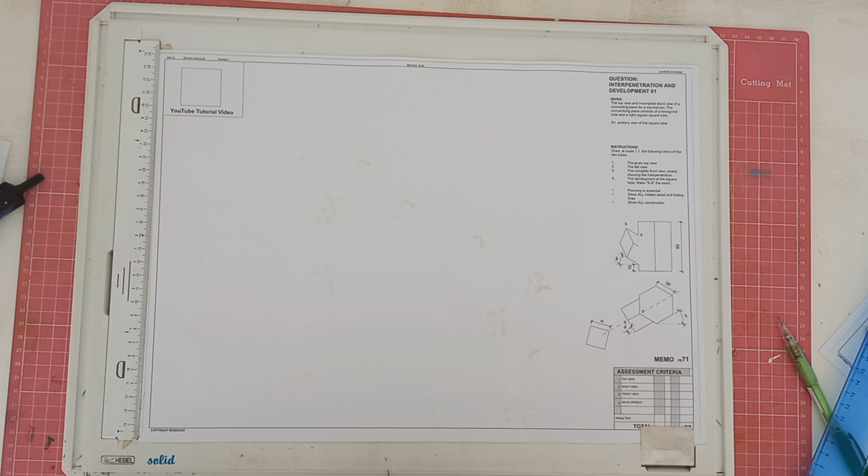Okay, so let's just get started. So we know that because we're drawing in first angle orthographic projection, interpenetration will be first angle orthographic projection, which means we will have the front view, the top view, the left view, and the right view. Okay, and 45 degrees, 45 degrees.

Now, because they're telling us they want the top view, complete front view, and the left view, we will know that this will be the top, this will be the front, and we'll obviously have to draw in the left view. So we're going to draw according to this orientation over here.

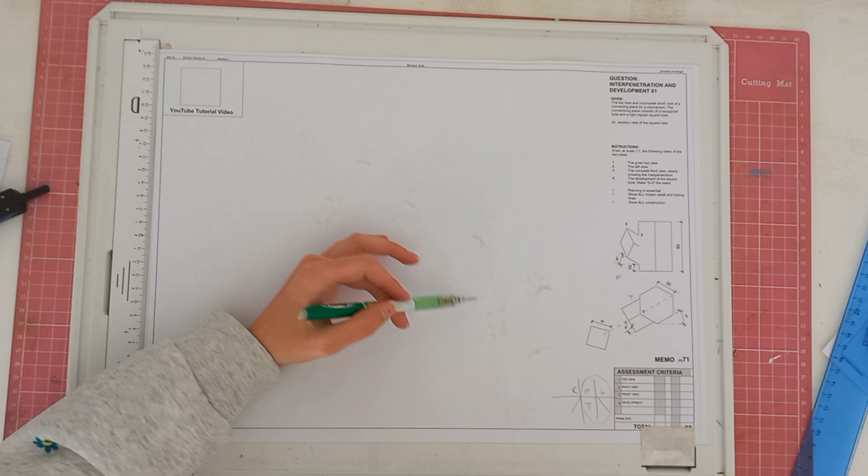Okay, and because of this, that means we should make it so that our page has our front and top view here and our left view here, and then we can do the development of the square here, or maybe at the top, depending on how the layout of our drawing works out.

Okay, so this is why they always say planning is essential, so that you don't start drawing and then realize, oops, you need to change something because now you've made a mistake. Okay, so we know top is going to be here at the bottom somewhere.

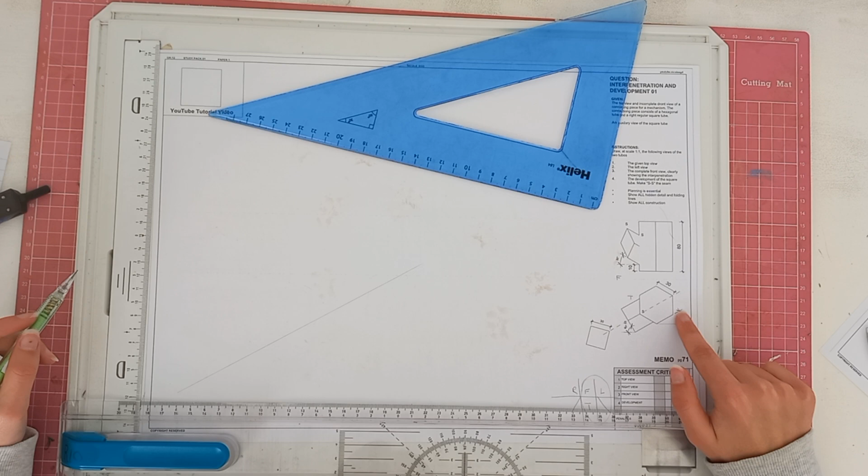So we're going to start off by drawing a 30-degree line going down like that. And the reason why we're doing 30 degrees is because you can see the angle given here to show that the hexagon is lying on a 30-degree tilt.

Okay, so now that we have got that, what we're going to do is we're going to take our compass with a measurement of 30. And so we're going to take the measurement of 30 on our compass, and we are going to draw a circle. So I don't want to waste too much space. I'm going to go here, so that it will leave enough space for the circle as well, maybe even just a little bit to the top.

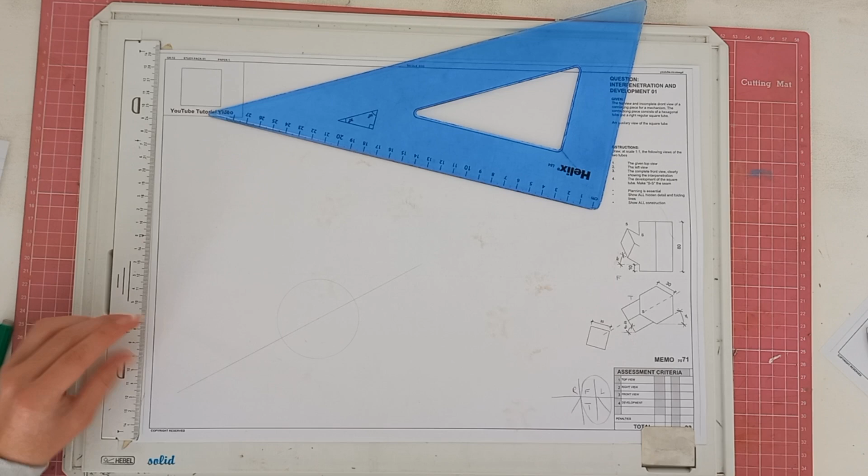Okay, and so we can start here. All right, once we have done that, we're going to section our hexagon so that we can obviously plan where everything will go. We're going to do that and that as well. Okay, and then we're going to lightly draw in the edges.

So everything we're doing now, we're doing in light construction lines, so that by the time we draw it in, we can draw it in solid and neatly without having to erase any lines that weren't supposed to be solid in the first place. Okay, and it's also good to start with construction because I know we're not really going

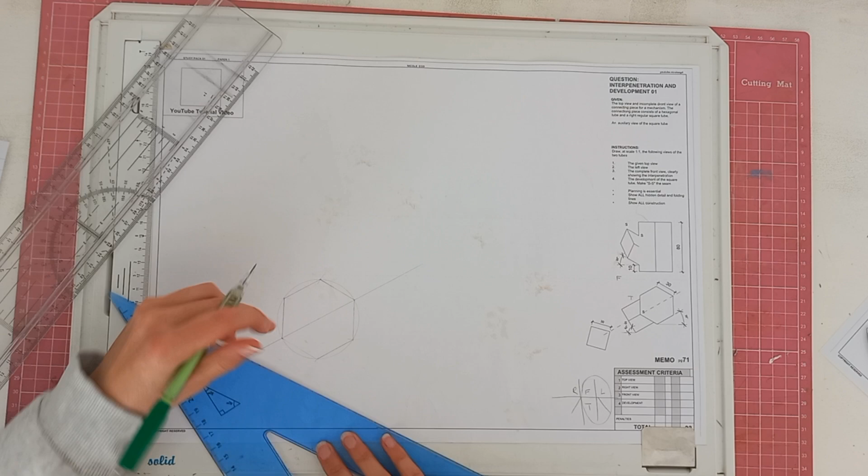to be doing anything to the top, but if you don't have enough space, you can then quickly erase it and start over again without ruining your page. Okay, all right, so there we've got our hexagon.

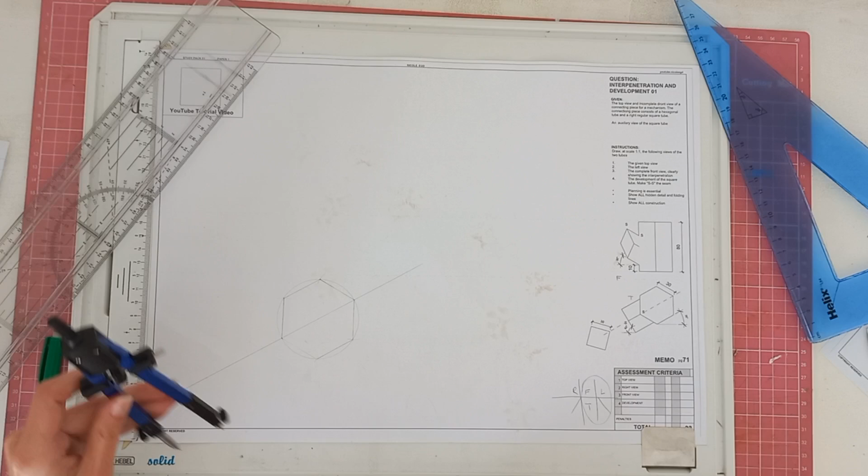Now we want to get this part of our curve in, but obviously it's going to be a little bit tricky because we've got a square here that's going to dictate where it lies on the curve. Okay, and so what we're going to do is we're going to take a measurement of 15 because that is half the length of the square side here, and we are going to draw a circle.

Okay, so it should look like this over here. All right, once we've got that circle, what we're going to do is get a square block around it.

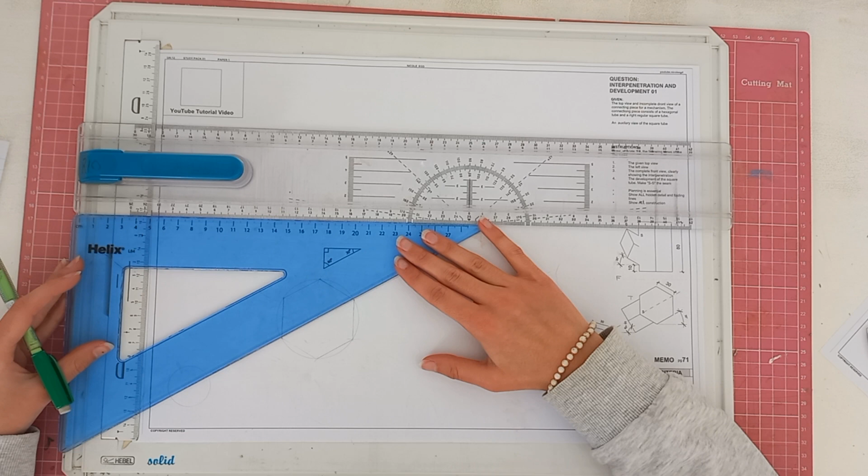So we're going to start off by taking our 30-degree set square, taking our ruler, and you see where we've got a 30-degree line. We're going to keep our ruler like that, and from that point we're going to draw in 45 degrees because obviously we know 45 degrees is this side of a square. Okay, so there we've got 45 degrees.

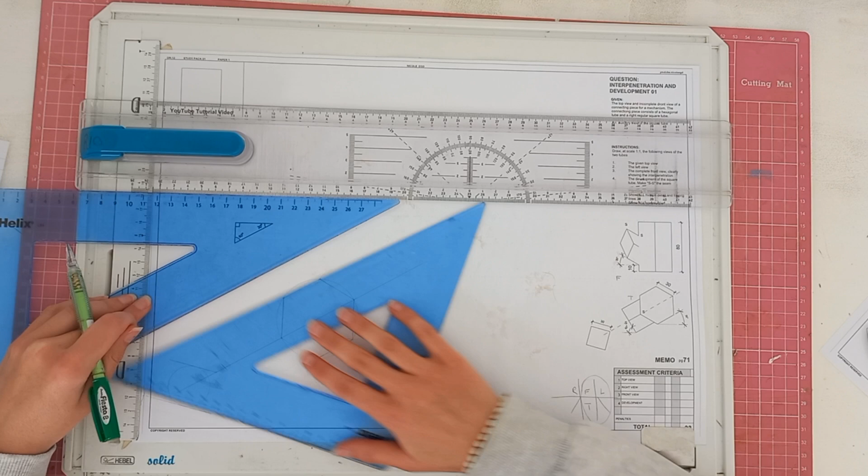Now you're going to just draw random lines, as you can see here, and you're going to do the same over here as well. Okay, and then from that point we can flip our ruler, and we are going to pretty much do the same thing on the other side. So you're going to have 45 degrees there, and then if we shift the ruler a little bit, we'll have 45 degrees there.

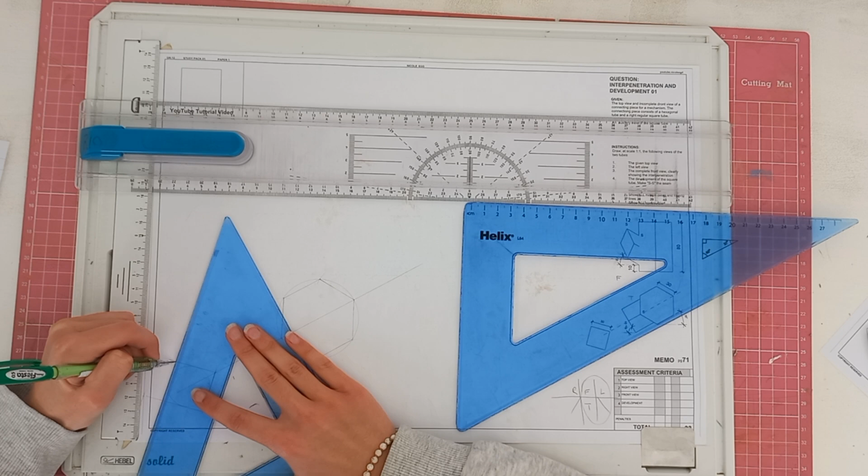And that will be your square, which you can draw in solid now, or if you don't want to, you don't have to, but we can see that so far everything is fitting, so we don't have to worry too much about space. Okay, so we're going to just quickly slot that in like that, and then you can label it as your aux view if you would like to, but you don't have to.

All right, so now we obviously want to get where this is going to be.

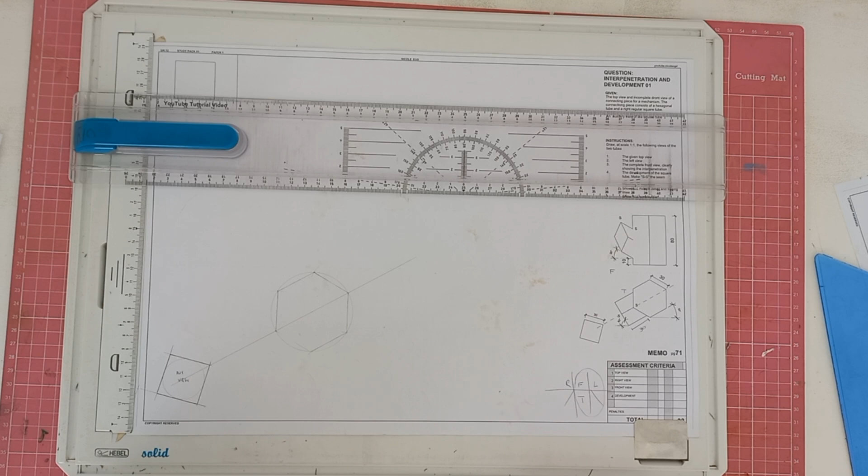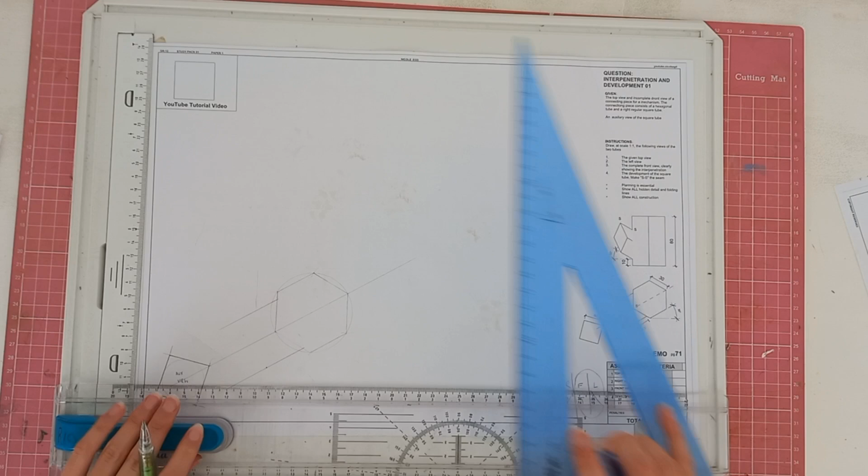Okay, so what we're going to do now is we're going to grab these lengths. Actually, let's do it this way because I think that will be a lot easier and more stable. We're going to take the edges of our square over here, so we'll have one, obviously have the middle one, which we already have, and then we will have this one on the edge here. Now we know our length is 30, so we're going to grab 30 over here, and then we're going to take 60 degrees and draw that in over here.

Okay, so it should look like this over here. Okay, now what we can do is we can draw everything in solid. So we're going to start off by drawing all of our edges a little bit darker so that we can have our complete top view.

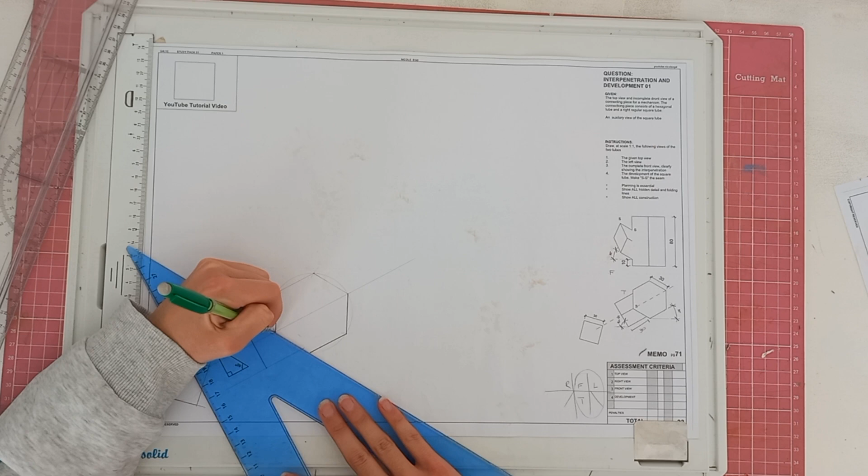Now, one thing I would recommend would be to label or number all of the parts so that as we draw, it will be less confusing for you guys and easier for you to keep track of where all your lines are going to go. Okay, so we know this will be SS, okay, and then we'll do the labeling once we do the front view.

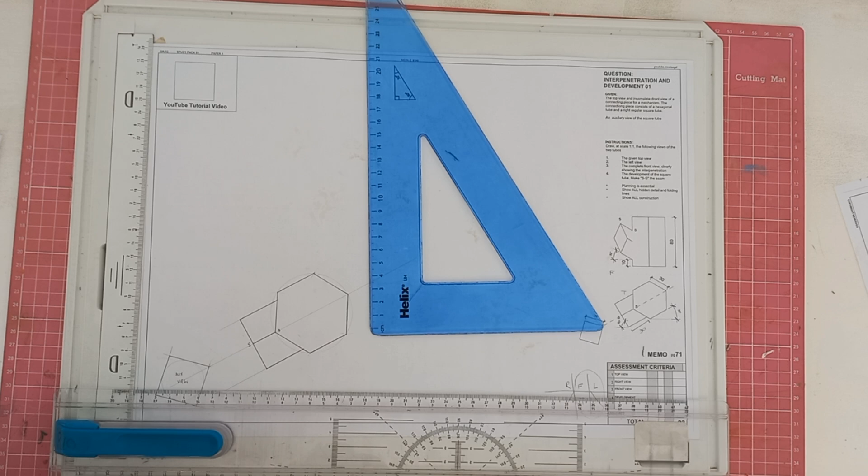Now with the front view, we are obviously going to need to draw in the curve of interpenetration, and so having this here will help us put it in over here. Okay, so we're going to start off by drawing our little section line.

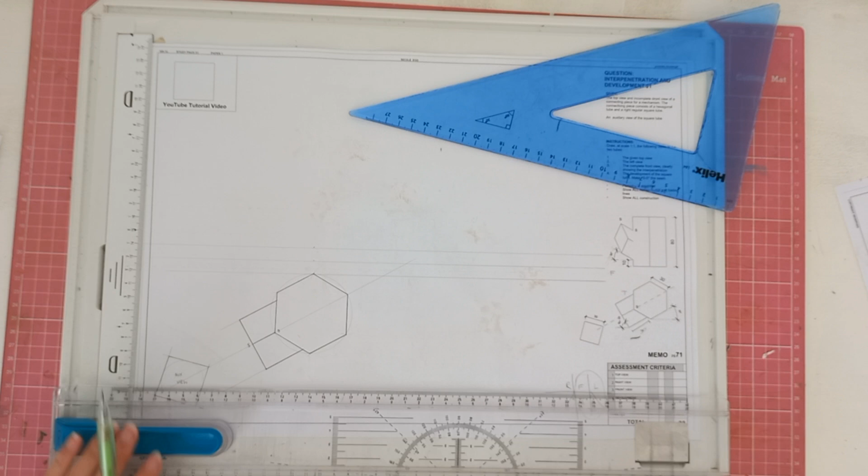So we're going to measure 10 from the highest point of the hexagon, and then from that point we're going to measure another 10, and we're going to draw lines across neatly like this, and like this as well. Okay, so you can see it starts to look like this, and then on this side we're going to do the same thing. We're going to bring up this line over here, and we're going to measure 10 and 10 as well.

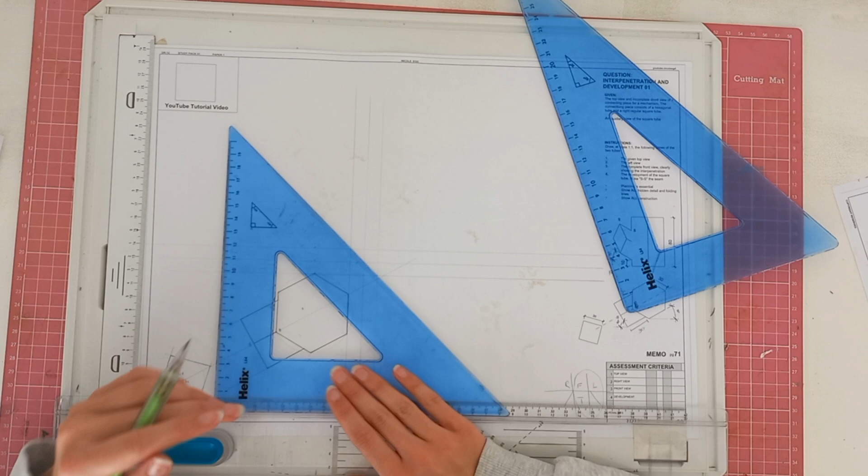Alright, so we've got 10, and we will have 10 as well over here. Okay, and then what we're going to do is we're going to grab our 45-degree set square, and we're going to draw a line going down like that.

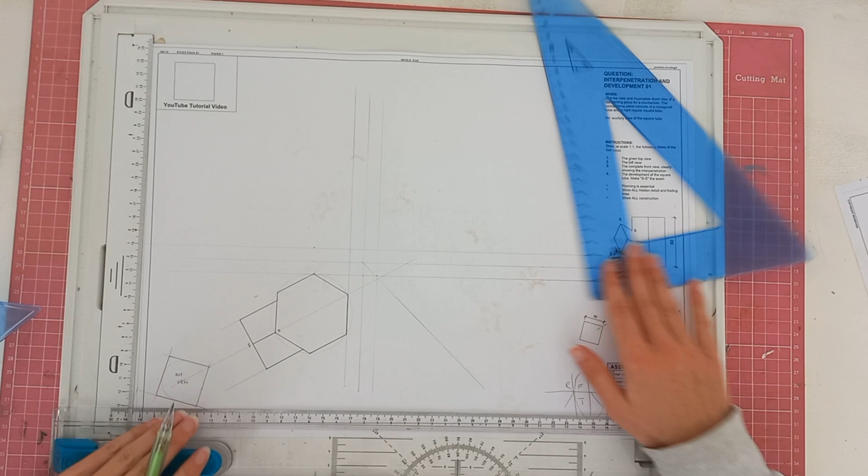Now we can start drawing in our front view. We've obviously already got this side line up here, which would be this one here. If you would like to get a head start on your measuring, take this over here, measure 80 because of the height over there, and then we are going to draw a line going across.

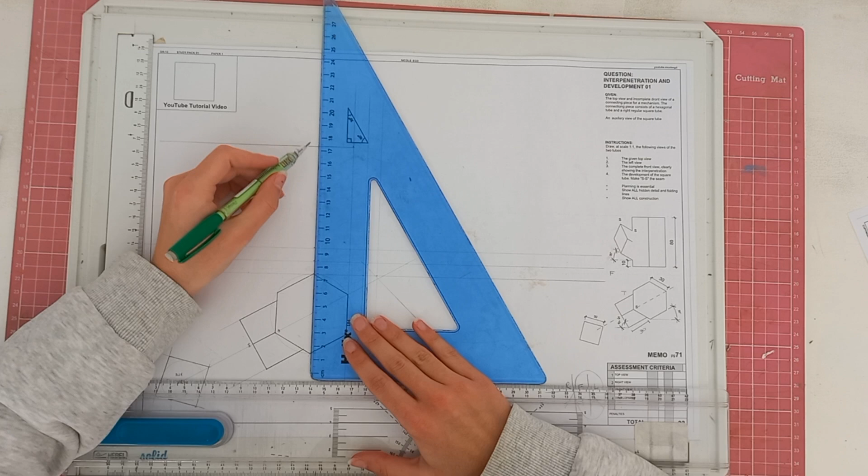Once we've done that, we're going to proceed to bring up this line here as well as this line over here. And then from there we're going to have points, so it would be easier to label it on the square. So we're going to say 1, 2, 3, and 4. Then we're going to have 1, 2, 3, and 2, 4, and then 3 on the side here.

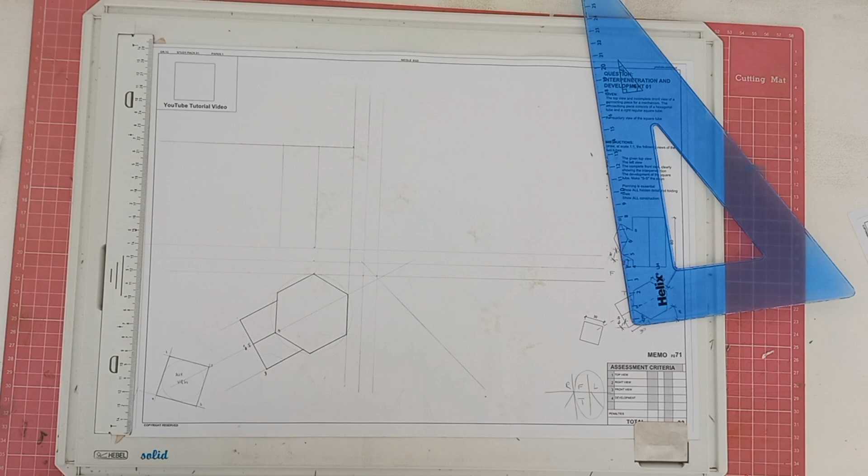Alright, so now what we're going to do is we're going to basically bring up all of our lines. So we're going to have 1, we're going to have 2 and 4, and we're going to have 3 as well. And then you'll see there's a measurement of 10 and a 30-degree angle. So we're going to measure 10, and then we're going to get our 30-degree angle.

So we know based on our labeling that SS would be at point 2 over here, which means that our bottom point would be 4. So this point would be 4, S would be 2, and then we'd obviously have 3 and 1, just to label it on this picture here for you guys to see.

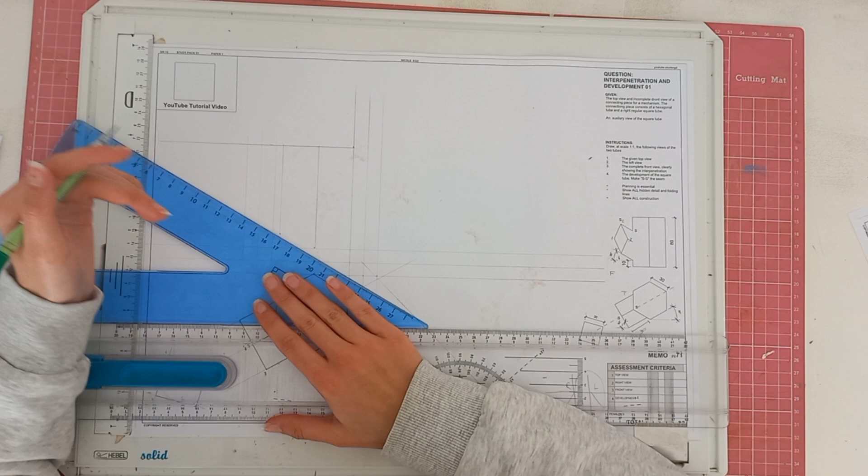So with that over there, we're going to start drawing in our bits and pieces. So we'll have 2 over here. We'll have 2 over there, and then we're going to need to grab the same square measurements. We're going to draw an auxiliary view on the side over here to get our square in.

So we're going to take the bottom point here, and from there we are going to do our 45 degrees, and then we're going to take our 30-degree measurement for our square. So we'll have that point over there, that point over there, and then again we're going to do 45 and 45. So we've got a second auxiliary view, and again we can label it.

So we'll have 4, 2, 3, and 1. And then we're going to measure it on the corresponding line. We've obviously already got 4. We'll put 2 over here, 1 over here. Obviously 3 will go over here. So we'll have 2, 1, and 3.

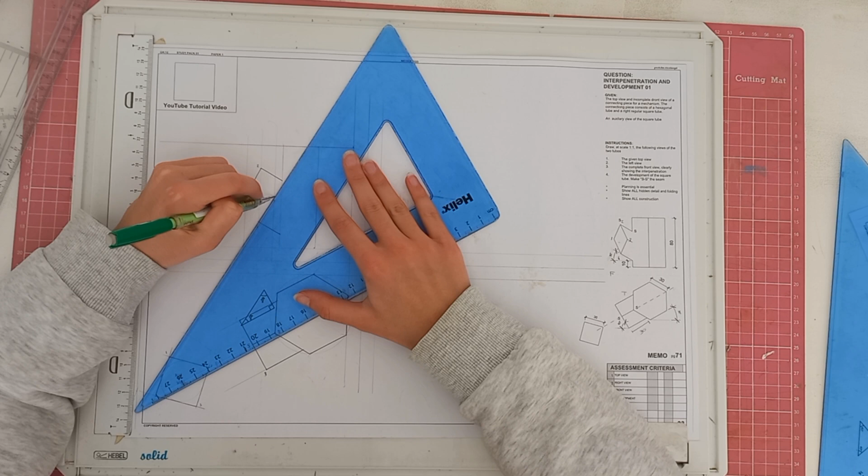Okay, so now what we're obviously going to be doing is measuring our 30-degree onto our points over there, right? So we'll have this far. Let's just draw in our square quickly. So we'll have the face of the square over here. Okay, so you can see we've got this so far.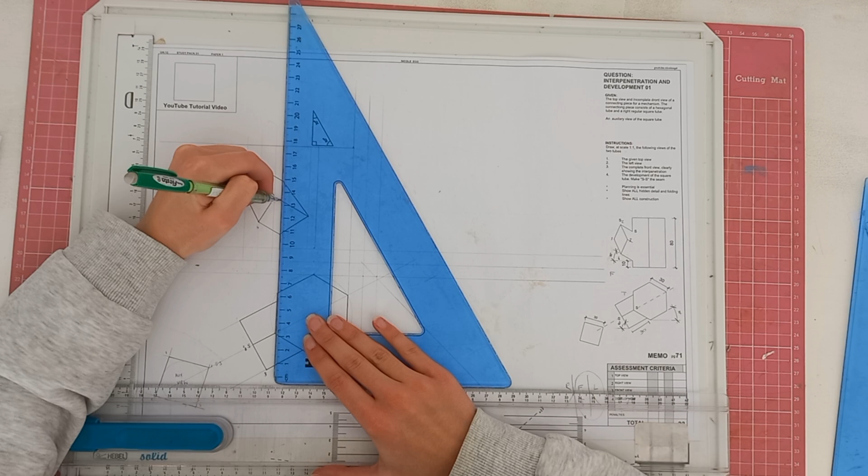As you can see, just like that. Alright, then we've obviously got our line at the back here at 1, which if we bring straight up, you'll see is already part of the hexagon. So if I just had to draw that in like that, you would see that quite quickly. And so we would dash it like this over here. And remember, your dash lines need to be lighter than your construction lines.

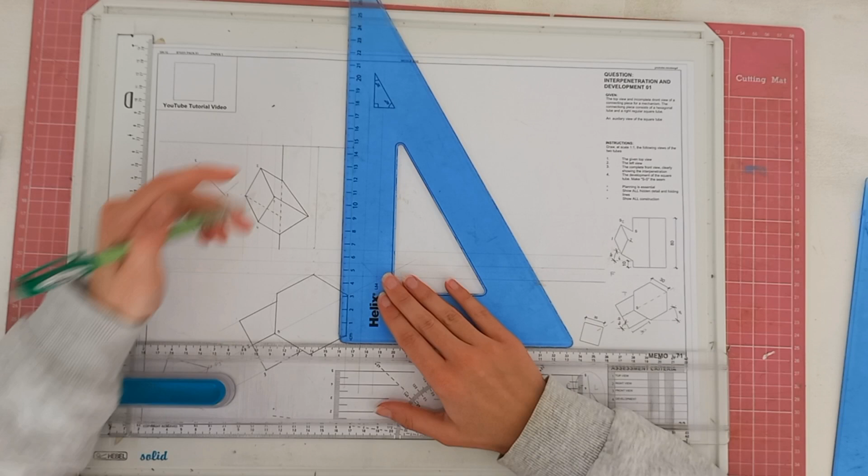And then we would take our 30-degree and we would dash it over here as well. And then we would draw in the rest of our view because our view would be uninterrupted further. And so our front view would end up looking like this over here.

Okay, just make sure your line touches at the top. My ruler has gone a bit skew, so it should be straight at the top.

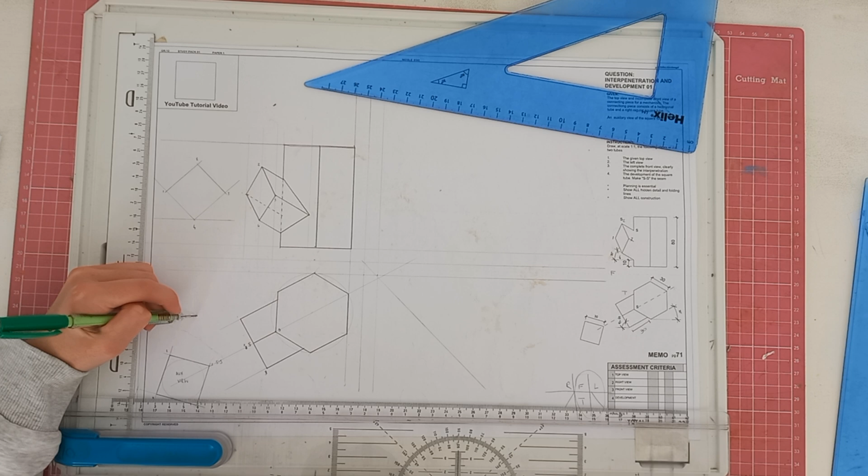All right, so now that we've got this over here, we're going to want to draw in the left view, which means we'd be looking at it from, if we've got our front view here, our left view would be over here. So imagine a man standing here and looking at the left view.

In fact, what I'll do is I'll quickly put up a video of the model for the interpenetration so that you can have a look at what we're looking at. And then once I've done that, we'll continue with the left view.

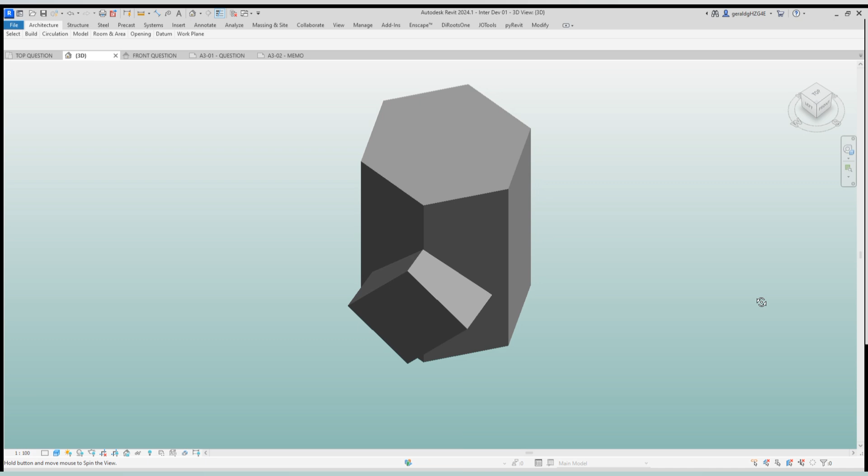Okay, so here you've been given the top view. This is similar to, or exactly the same as, the one in your question paper, which is what we are looking at now. We're going to tilt it so you can have a look at the different views. What you're looking at is part of the front view, just at a little bit of an angle, and basically we're just giving you an idea of where the square will sit on the hexagon.

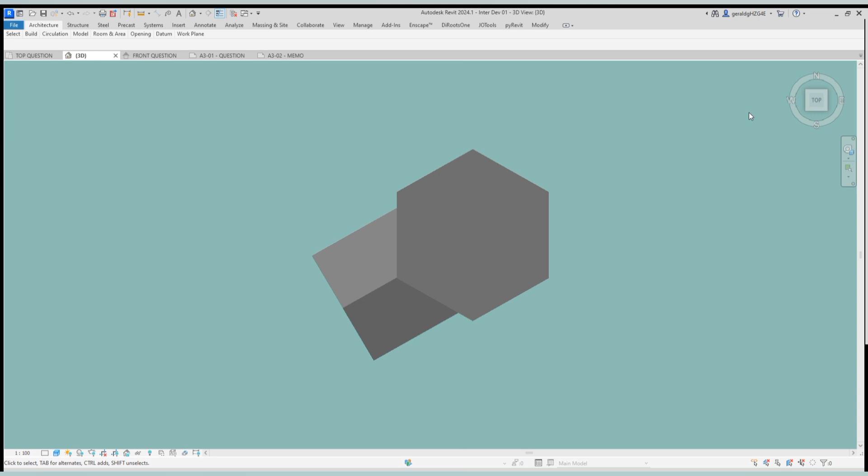Okay, so you'll see now we are looking at the top view. We'll be looking at the left view next. And then we're going to just show you again what it will look like all around, just so that you get an idea of how it actually looks in real life, and to help you better visualize your modeling and for your drawing. Left view.

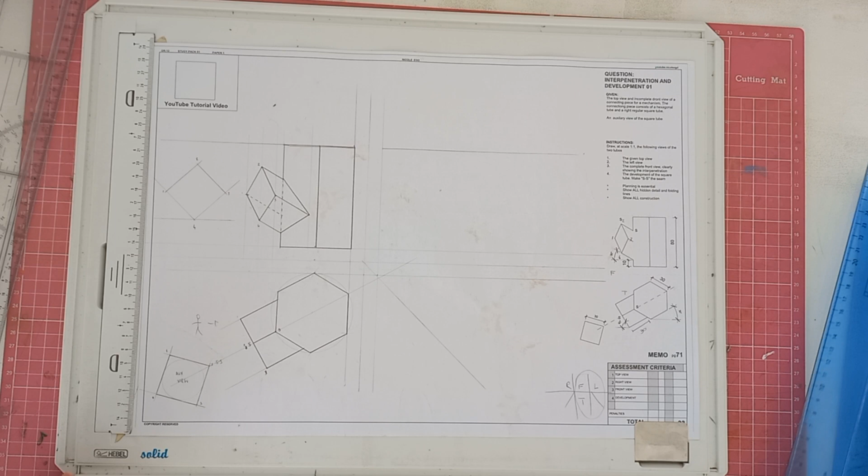Okay, so now that we've seen how the model works, we are going to carry on drawing everything over here. So we're going to bring that across the height, and then we're going to start bringing across the hexagon. We've already got the edge over here, but before we continue, let's label it. So we're going to have A, B, C, D, E, and F.

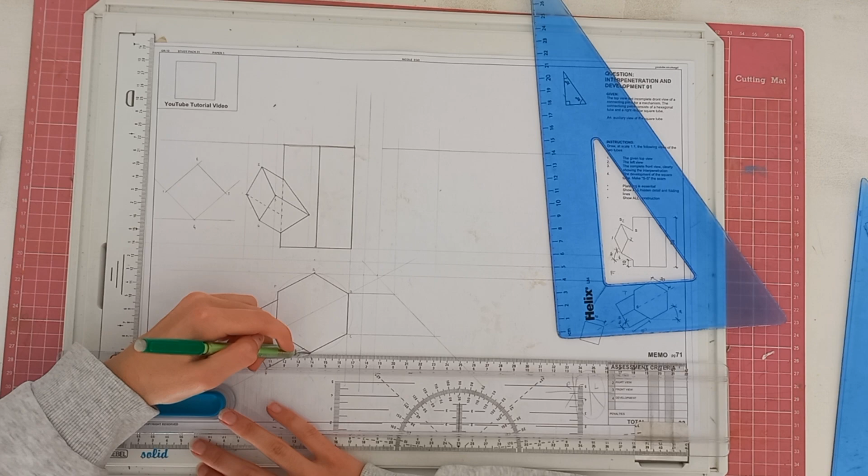Okay, so we know that A will already be brought straight up, so we don't need to worry about A. Then we're going to bring F and B up. Let's bring that up over there. Then we're going to have E and C, we'll bring that up over there. And then we'll have B to bring up as well, which will be over here.

Okay, and then what we're going to do is label that. So we will have, oh, did I say B? I meant D. So we'll have D, C, E. We've got A, and then we've got F and B.

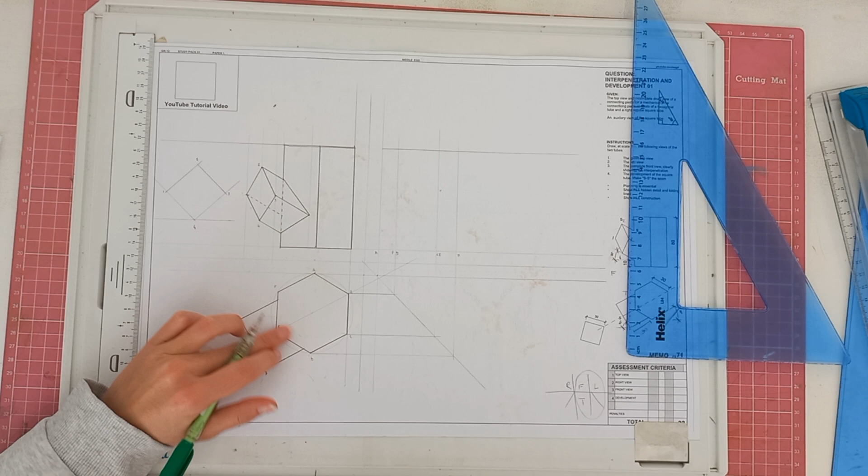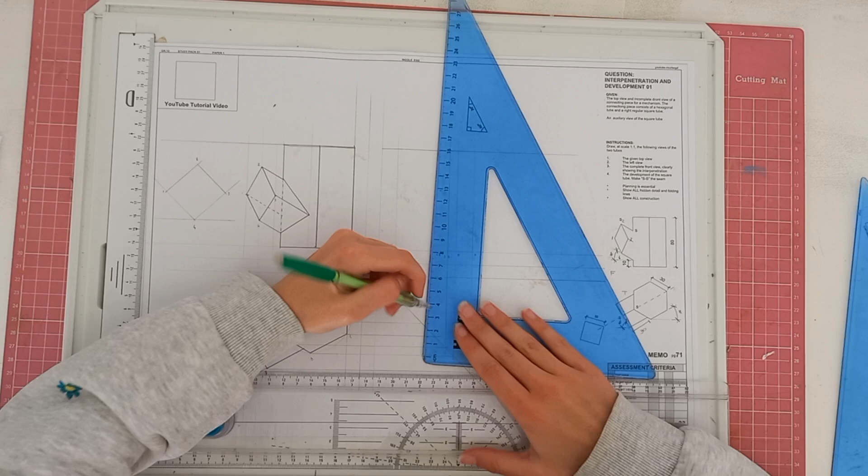Okay, and then we are going to bring across the curve of interpenetration. We're going to start by bringing across points. So we'll have 3, which we'll bring up here. Then we'll bring this one across over here. And if we bring that across and up, we will have 2 and 4. And then if we bring this one here across, we will have point 1. Okay, just like this over here.

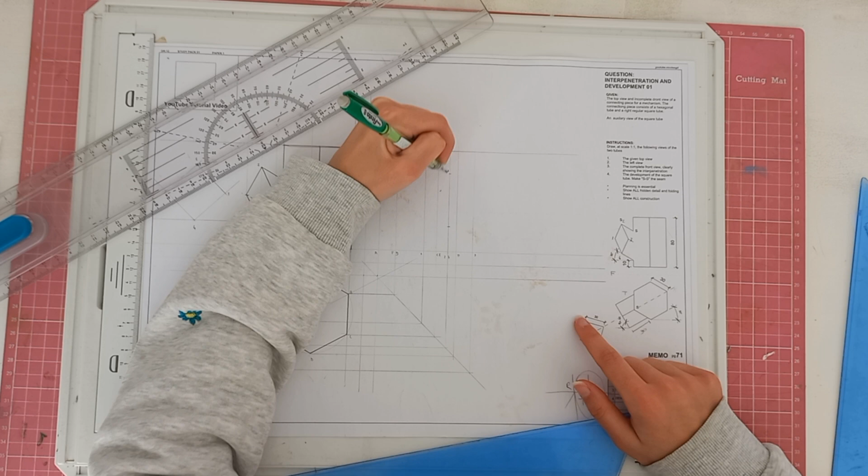Now we obviously want to get our points in, so it would be best for us to start with the curve of interpenetration, finding the points and their corresponding lines. So if 2 is over here, we're going to find line 2 and make our mark. Line 2 and 4 will be on the same point this time, so we can label 2 and 4. And then we're going to bring across 3 and 1. So we'll have line 3 over here, and we'll bring line 1 across, and it will land up over here.

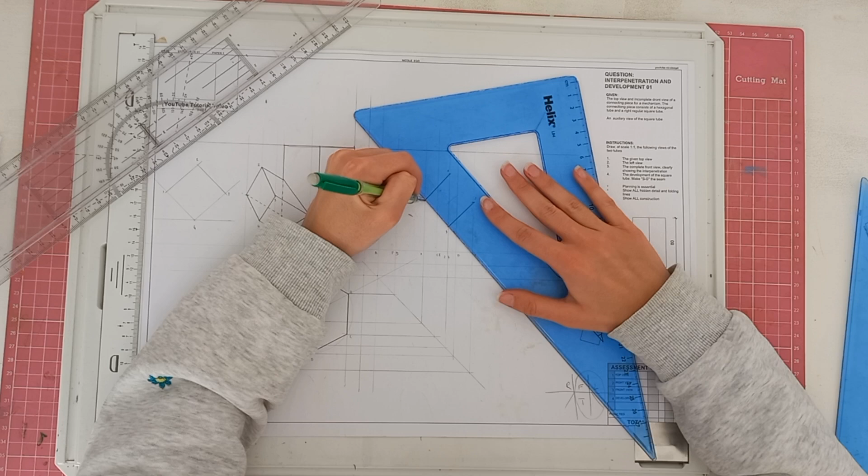All right, once we found our points, we can draw in the curve, or not the curve, the face of the square, just like this over here. Okay, so you'll see it will look just like this over here.

All right, so what we're going to do is from here, we are going to see what we will and won't see. Okay, so if we bring up the back point here, we can see that the curve shouldn't touch it, because if we got point A here, you can see the curve doesn't influence it at all. So we're going to draw line A as a solid line. The same can be said for F, because if we have a look here, nothing touches F, and so F will be a solid line as well.

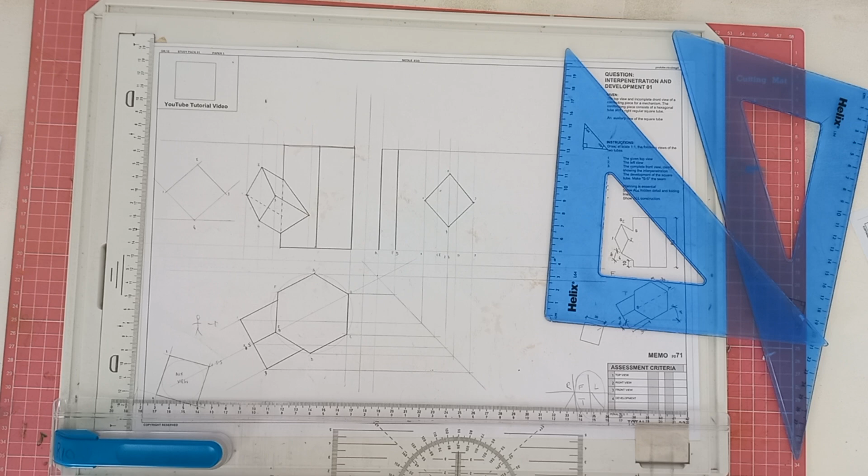Okay, so far what we've got is this over here. Now here's where it gets a little bit difficult, because things will change.

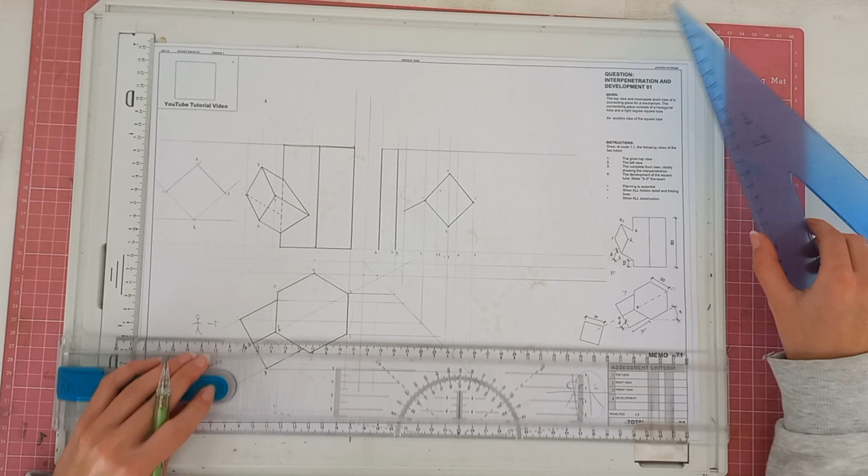All right, so we're going to start off by bringing point 1 up. We're going to find where it touches the hexagon over here, bring it up, and then because we know everything is sitting at a 30-degree angle, from 1 we're going to bring it back so that it touches this line here.

Then we are going to find the point, and if you have a look here it should line up. Why is it not lining up? Sorry, you're going to bring your point from there. I don't know why I'm being silly. Because of the view change, the angle will look a little bit different, so you're going to bring it across from there onto the correct line.

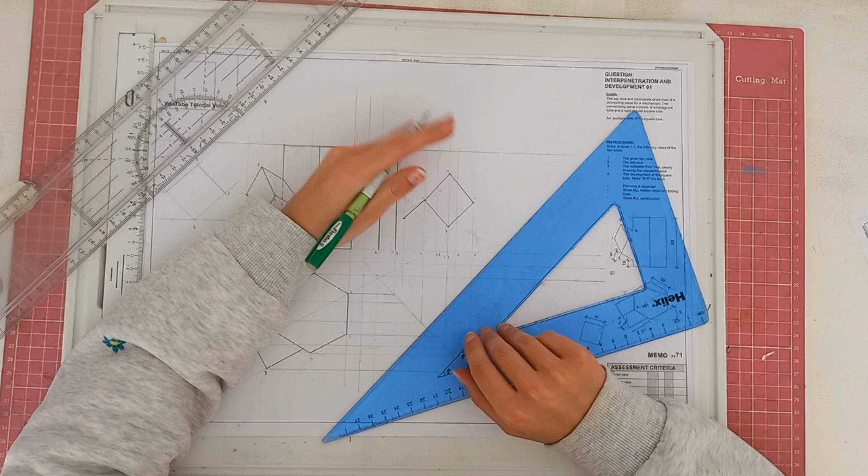My bad. Okay, then we've obviously got line E, where points 2 and 4 do touch, so we're going to bring that line across and up as well. You can see it's right in line with the other line that we've got over here.

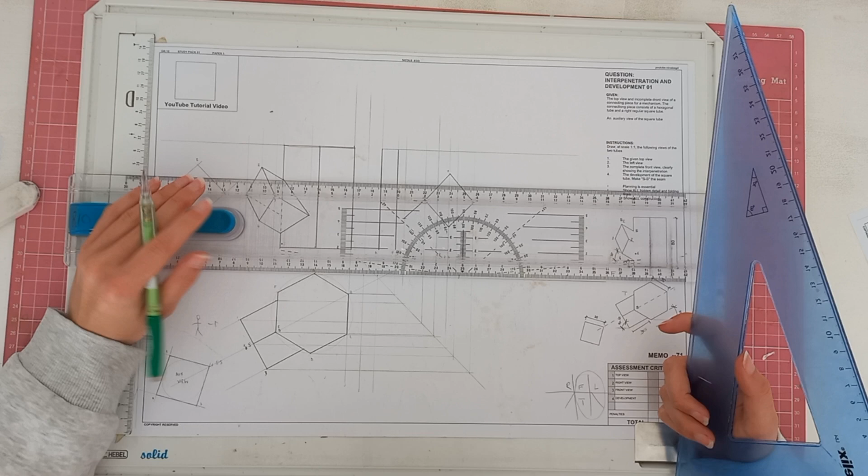And so we're going to bring the corresponding points, so we'll have 2, and we will have 4 where it touches here at this line over here. And so if we have to connect those points, we would have 2 at this point here, then it would connect to 1 from that point over there, and then we would have 4 connecting to point 4 over here, and then it would connect over here as well. Okay, it should look like this so far.

Just make sure yours looks neat. Mine's a bit messy now, so it looks a bit messy, but that is what it's going to look like so far.

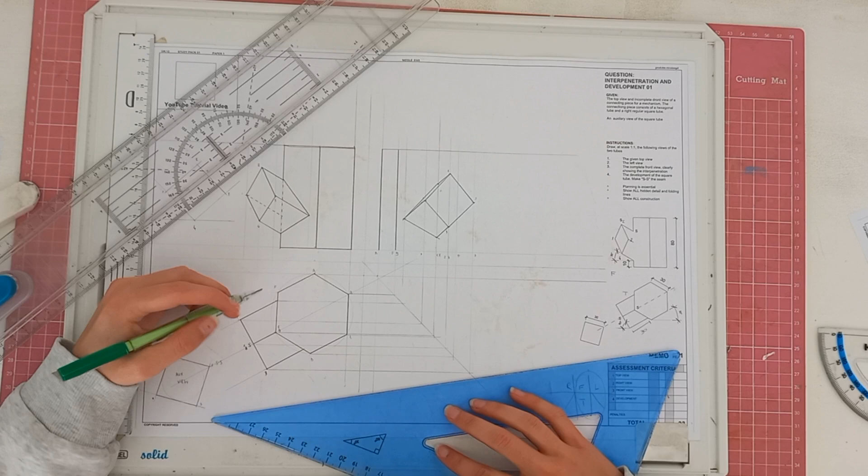Then we've obviously got point 3 as well, and point 3 will land up over here, so we're going to bring point 3 across and straight up like that. Then we're going to find where point 3 corresponds, which will be over here.

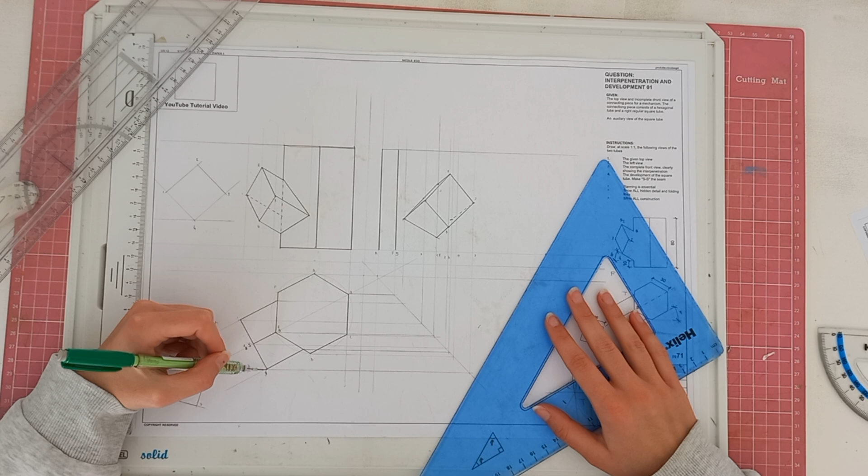And so what we're going to do is dash it, because it will be behind and you won't see it, so we'll dash point 3. Then we know point 3 will join with point 2 and point 4, so from there we're going to dash our points together like this, and then where it touches point 4, we'll land up over there.

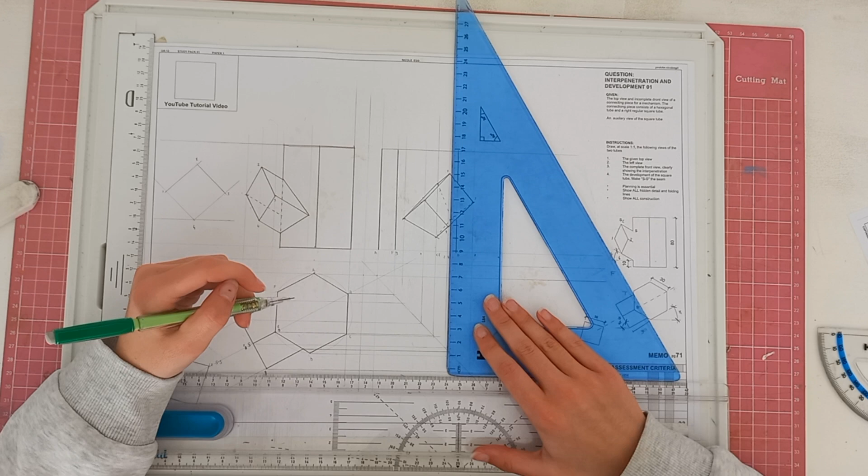Okay, and then we're going to start adding in the rest of our lines for our curve. So we will have this point over here, which will be solid. Then we will have point EC, which will be this point here, also solid, and it will be dashed on the inside, and then it will go back to solid, just like this over here.

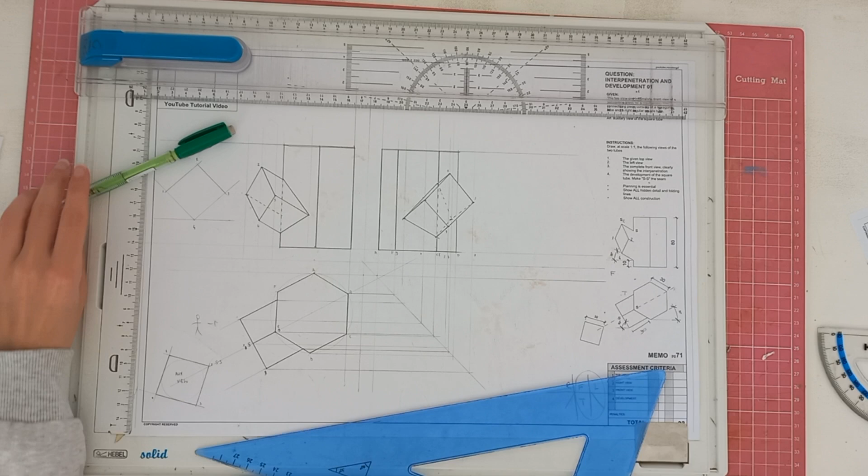And then obviously our top and our bottom views will be solid as well, except don't draw yours over like I've done. Okay, so it should end there, not out and over there.

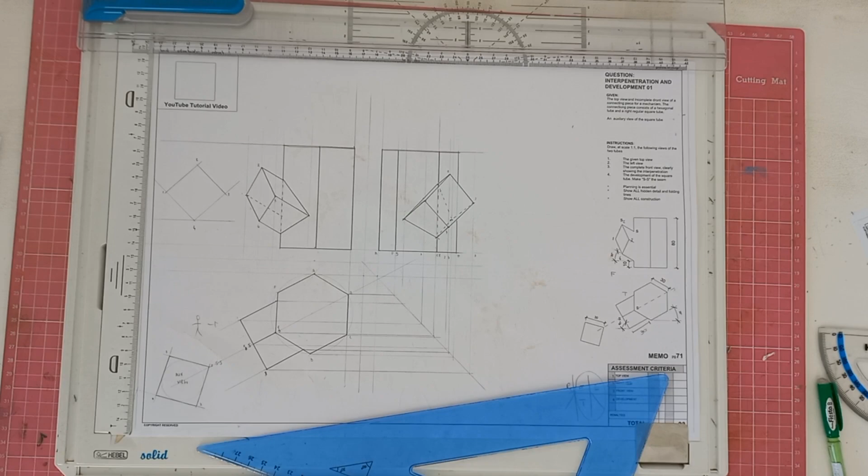Now we obviously want to develop the curve or the little development of the square, and that is the next part we're going to be working on. So let me just clear up some lines quickly, because I've got things in the way here and I would like for you to be able to see what we're going to be doing.

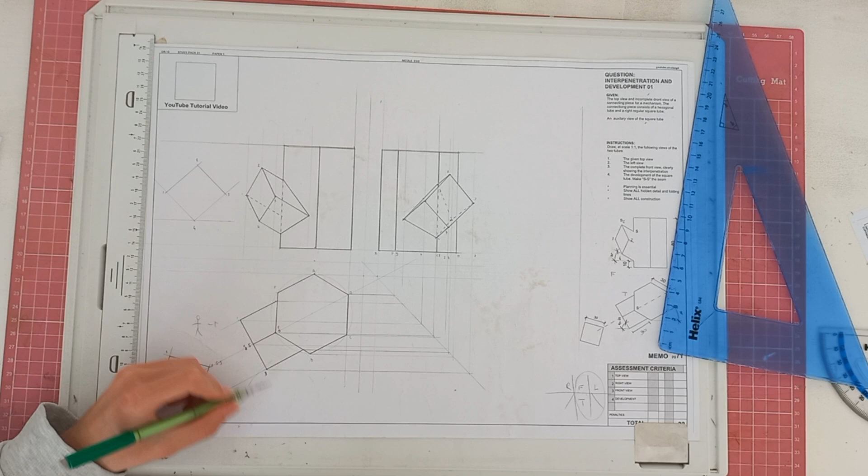Okay, so now that we have got these lines removed here, I've decided I'm going to draw my developments on the side here. So we're going to start off by drawing a vertical line going down like this, not quite on top here, but mine is what it is. Then what we're going to do is basically take this part here and unfold it so we can see what the square looks like. You can see here that it's flat, so we're going to use the flat side as our development side, and we're going to get started.

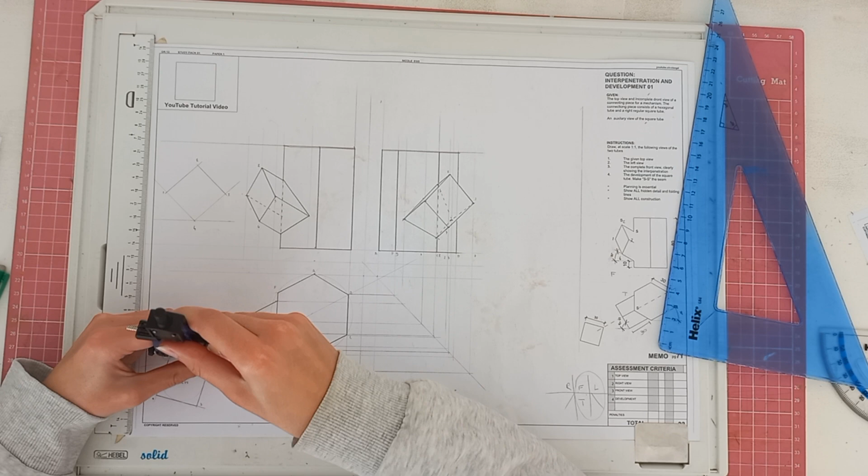So what we're going to do is, I've labeled here SS, grab the measurement of the square and have a starting point. We're going to draw a line, so I just need to mark where I put my starting point. Sorry, if I were you, I would actually start by drawing a line like this.

Oopsie. And that is why we draw our lines first. Draw a line. Oh my gosh. Okay, let's just do this again.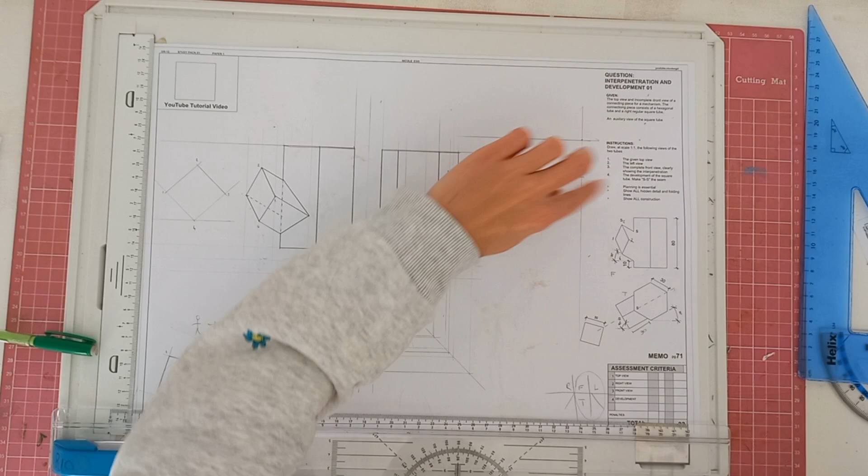So you would draw your line there, and from there you would measure so that you know where your points are. Oh my goodness, I can't see over this ruler without getting in the way. So let me just...

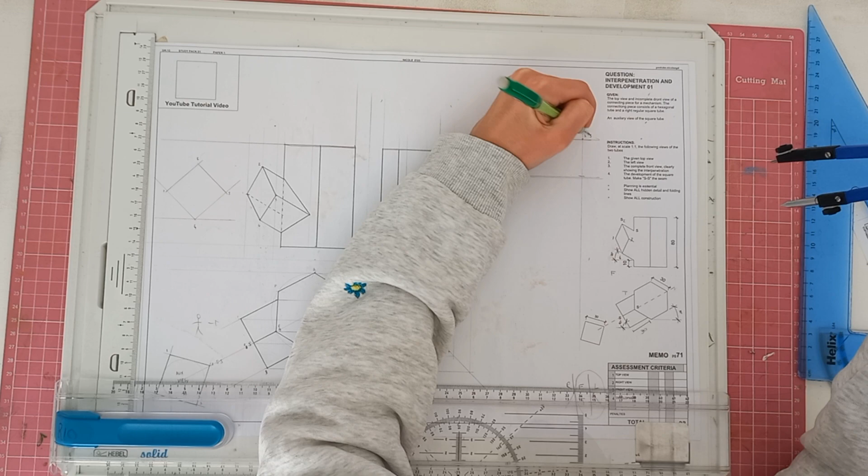We've got the one developed there. Then what we'll do, so we can label this side S, S. Then from there we're going to do another measurement, so we'll have one over here and one over here for now. And then we're going to draw lines at those points as well, so we'll have a line over here.

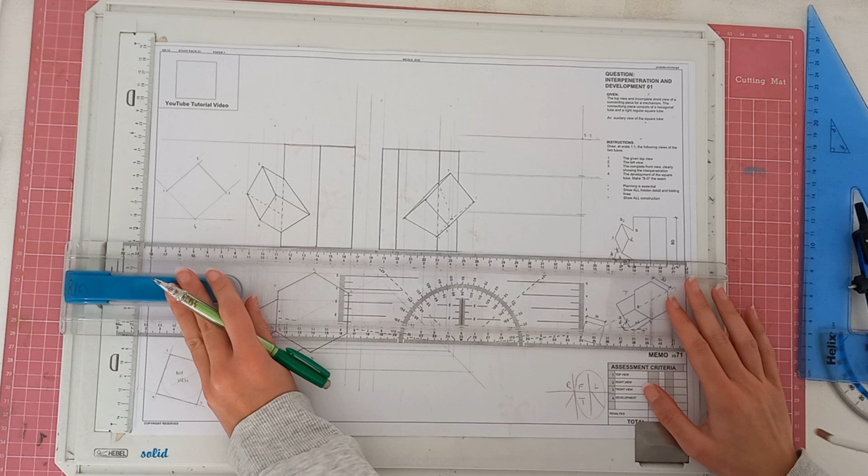Why is mine so skewed? Okay, a line over there. And a line over there. Make sure you only have single lines, but you guys will be able to lean over and see. I try not to lean over because I don't want my head in your guys' way, otherwise you're not going to see what I'm doing.

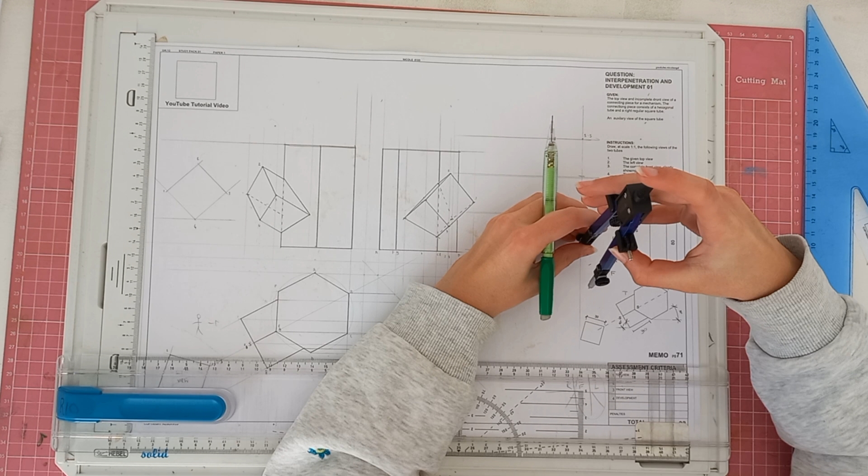Okay, and then we'll have one last side, and draw a line across like that. Okay, so that means our SS point will be at this point as well.

Okay, so we've got S, and it should just be labeled S here. I was just trying to show you where we start.

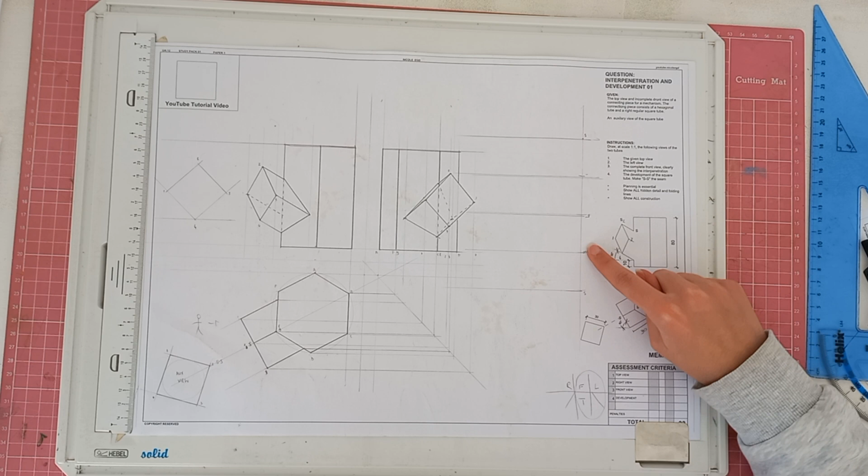Okay, and the reason why is because you'll have 4 parts, obviously 4 parts of the square. So if you cut it here, which is what we're doing, and you unfold it, these will be on the edge. So say if we snipped it here and we unfold it, we would have S, then we would have 1, 4, 3, and then S again, because it'll be 1, 2, which would be 2 as well, 3 and 4. Okay, so I hope that makes sense to you guys.

And then what we're going to do is we're going to grab the lengths of each side. So obviously we've got SS, which will be this length over here. So we're going to grab the length from this line here, and we're going to plot it onto our paper. You can do that on the other side. Okay, and then we're going to grab...

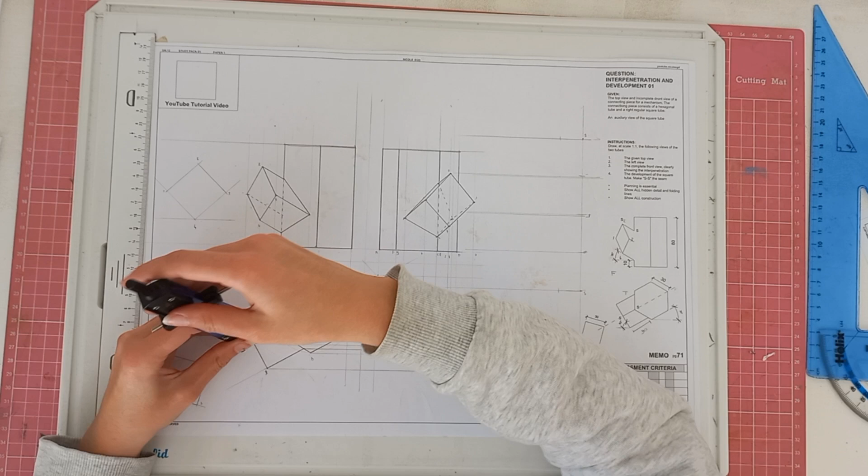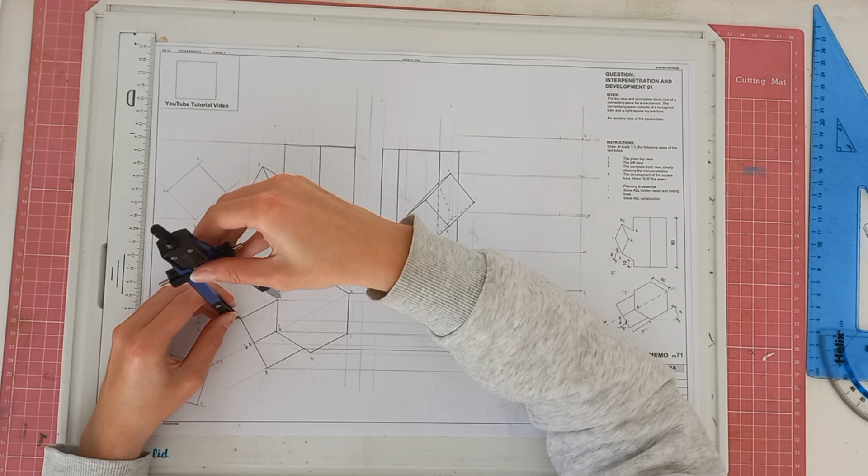Oh wait, that would also be the measurement for 4. So my apologies, I have 4 over here, just like that. And then we would obviously grab the measurement for 1, which would be this measurement over here. So we'd put that over there. We do the same for 3, which will be the same, and we put it over there. Okay, so that you have all your dots on your lines.

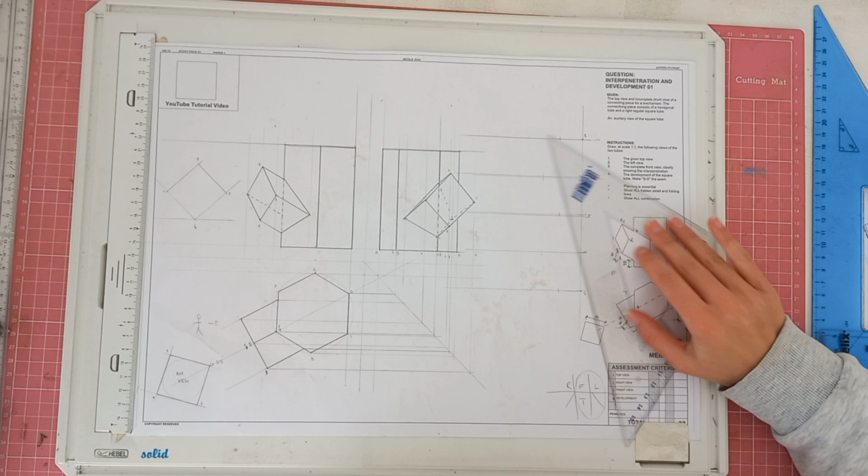It can get more technical, but we're not doing a technical drawing as your first drawing in the study guide. That will obviously be later on in the study guide so that you guys can understand the work before we throw you in the deep end.

Okay, and then all you're going to do is connect your points. So you'll draw a point over here, have this connecting over here, this connecting over here as well. And then we'll draw in the bottom over here, as well as our SS edge. So here you can label SS, here you can label SS, seal that, and then you'll obviously have your folds as well.

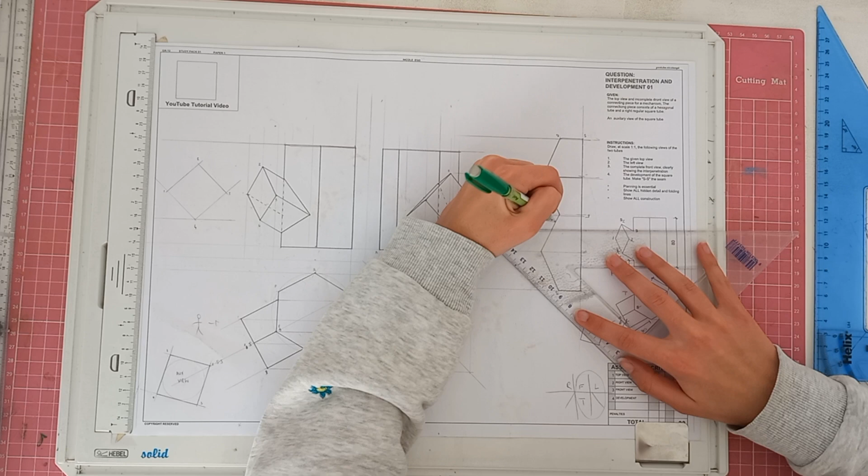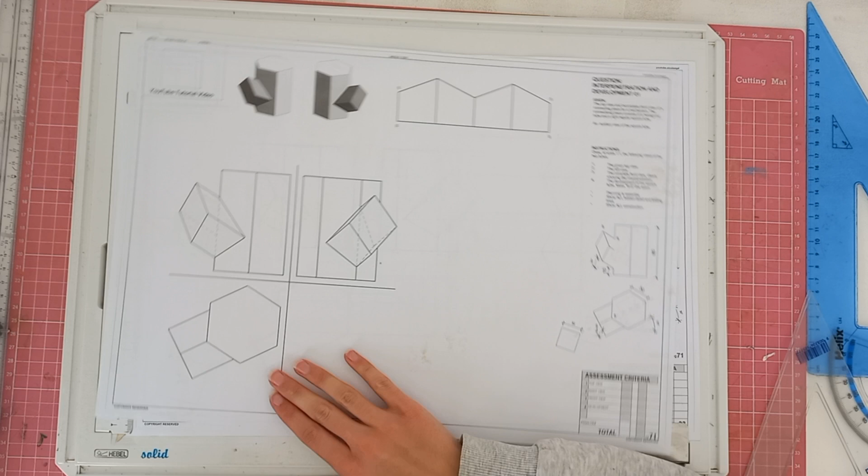Okay, and you'll see on the memo here that will be provided in the study guide as well what your development will look like, what your drawing will look like. We will obviously put the construction lines for you guys as well so that you can see where we got certain points from. And then you've got little pictures of models here for you guys to have a look at if you struggle with visualizing and understanding how it works. Okay, so we hope this helped you, and we'll see you in the next video.